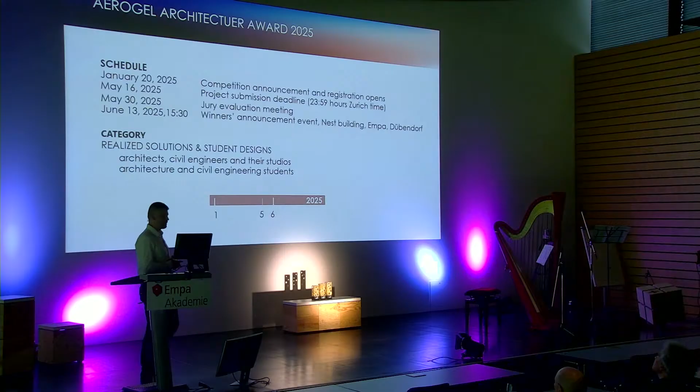In our laboratory, EMPA 312 Building Energy Materials and Components, we would like to develop new aerogel materials, also to develop new aerogel material applications for buildings. And...

That's why we established the Aerogel Architecture Award. And we are especially interested in the thermal insulating property, translucent property, and also acoustic properties, and their use in architecture. So building application of aerogels, that's why it was established.

And this year, in 2 categories which were open internationally, realized solutions and student designs, but they were joined into a common joint category for this year. Purpose of this award...

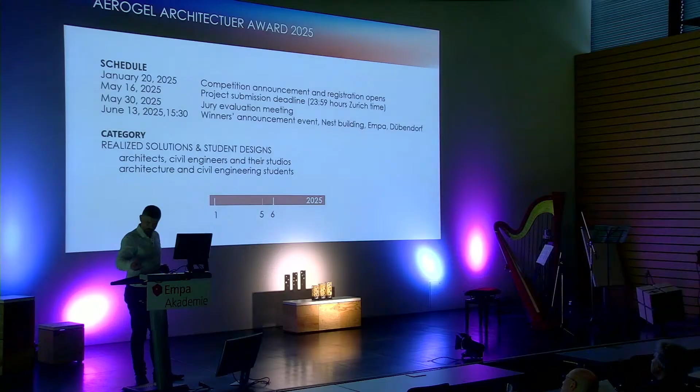is to highlight great examples of aerogel use in buildings and summarize experience on aerogel use in architecture and construction. And we believe that it can strengthen the knowledge and also the trust, which was mentioned already here, in use of aerogel materials. This was only possible due to our...

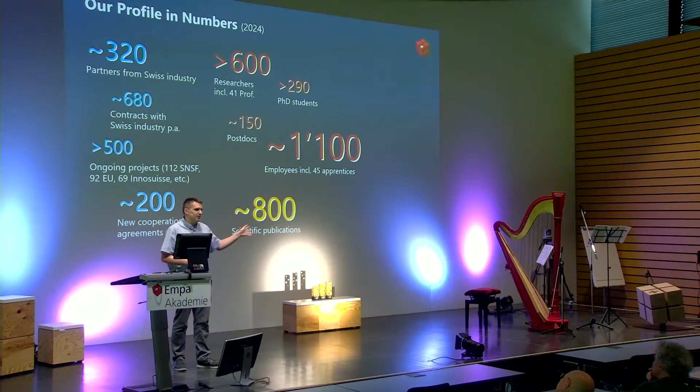As I said, we are about 1,100 employees. We publish scientific papers, but we also have a lot of research projects and contracts with Swiss industry partners, also some European and international industry partners. We have 37 spin-off companies, and we have a base funding from the Swiss federal government, which is augmented by third-party funding, project funding.

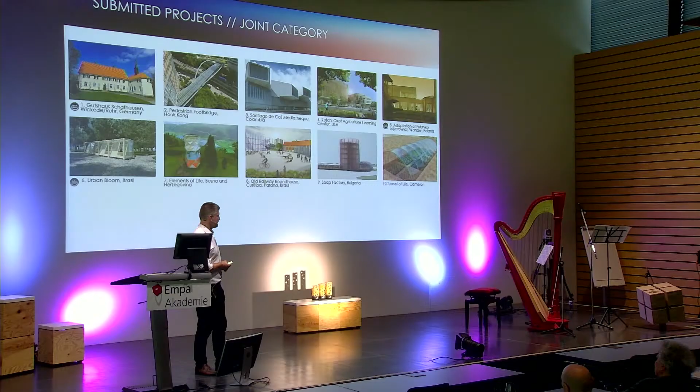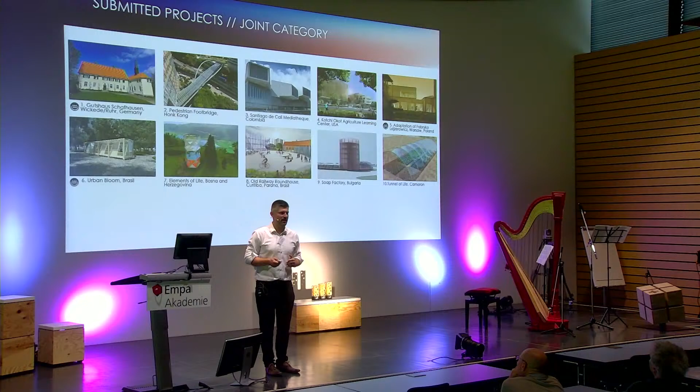Thanks to their experience, the selection and evaluation was in great hands. So we received in these two categories 10 projects. We know that aerogel in buildings is niche, but we didn't know that it's so niche. So the jury decided for this year to join the categories and evaluate all projects in the joint category and reward them with the same monetary prize.

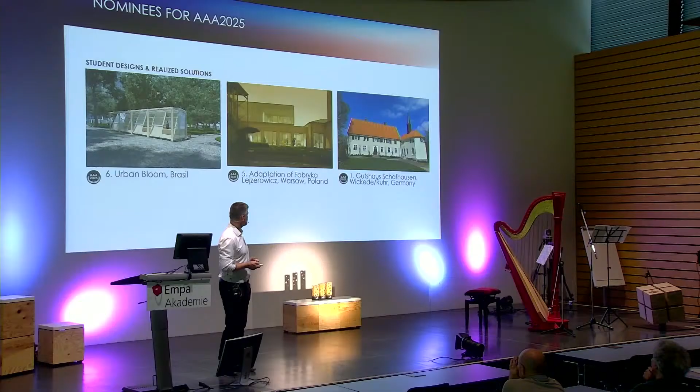Some selected projects: the first project is a proposal for a greenhouse called Urban Bloom from Brazil, by students from Brazil. The second project will be adaptation of a factory in Poland, Fabryka Lejzerowicz, located in Warsaw, Poland. And the third project, a realized project, is the renovation of manor estate house, Gutshaus Schafhausen, placed in Wickede, Ruhr, Germany.

So now I will ask our esteemed jury member, architect Manfred Wehdorn, to give some words on the award and selection of the jury. Okay. I can take it.

Okay. It's working? Maybe it's working. Should function. Yeah, perfect. Nice afternoon to all of you. I'm one of the members of the jury coming from Vienna, as you have heard. And may I make at first a general statement?

I would say talking about aerogel means talking about sustainability. To look back to the history, I'm not only an architect, I'm a historian too. You remember perhaps 57 years ago, the Club of Rome was founded. And in 1983, the United Nations founded the World Commission for Environment and Development, a long time ago. And it really took a long time until we all developed the importance of sustainability. Then the Common Future report was published by the Commission for Environment and Development.

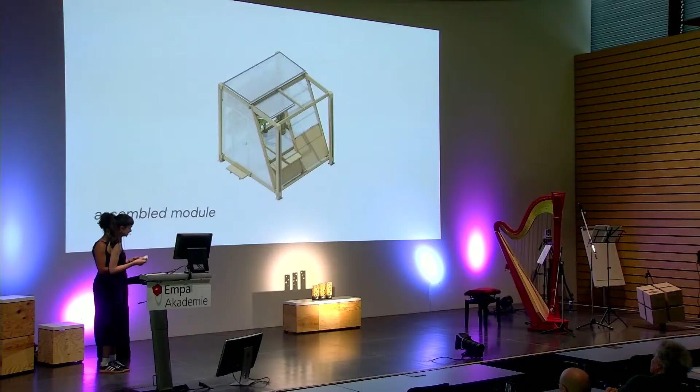Here is the assembled module. It consists of a glue-laminated timber structure sealed with translucent polycarbonate panels filled with aerogel.

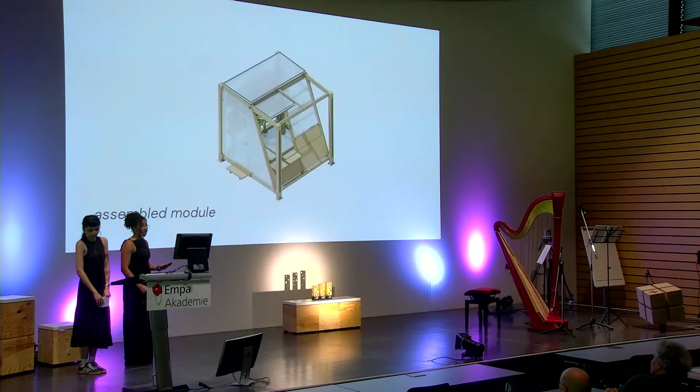The design emphasizes modularity, enabling this unit to connect and be assembled with others if needed to scale to a bigger project.

The module is compact, yet very functional because it has an inclined facade that can be changed and can create openings and display shelves, so it can function for selling as well as marketing. I would say it's a very functional, modular design.

As I said, you can scale according to local needs. So if you need a bigger assembly of modules, you can just unite them and make design choices according to the place it is in.

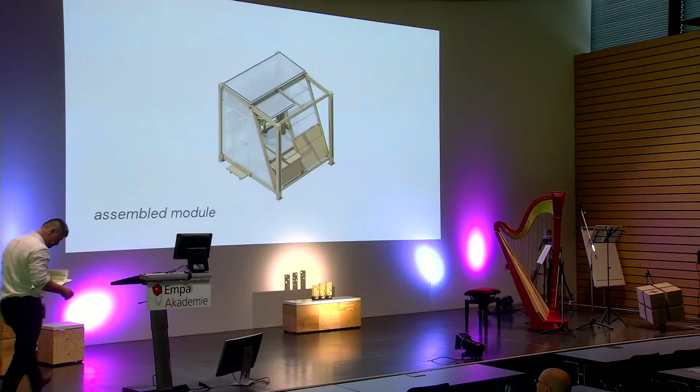The second presented project in this joint category will be the adaptation of Fabryka Lejzerowicz Lubelska Kamionek, located in Warsaw, Poland.

Design is made by students Jiří Petrželka and Kristýna Klusová from Czech Technical University, Department of Architecture, Prague. I can say that this duo also already won, two years ago, the Aerogel Architecture Award 2023, first prize in the student category, and it's a great success again that you were selected among the nominated projects.

Floor is yours, Jiří. Unfortunately, Kristýna could not come, but yeah.

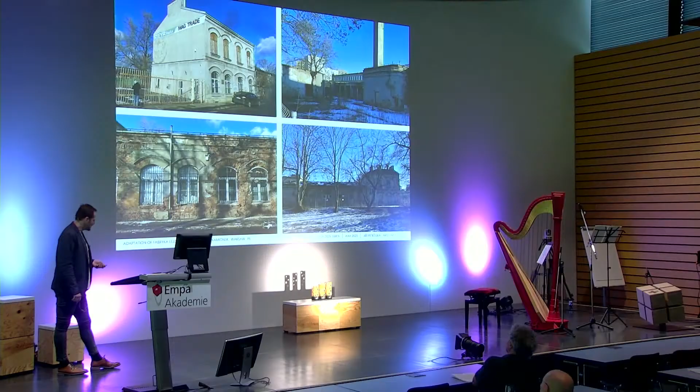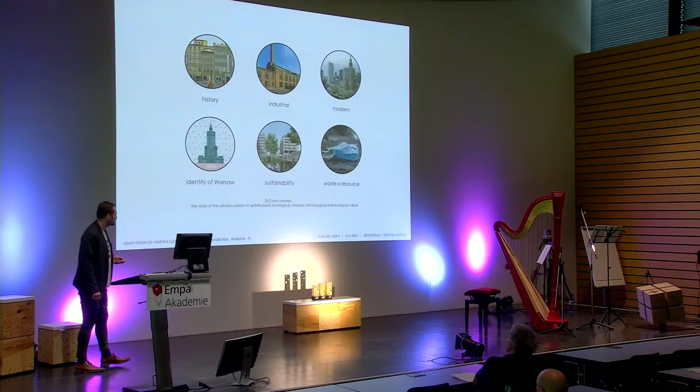Here you can see some photos from the area. As you can see, the building is in really bad condition for a lot of the properties or premises. The key for our design was how to connect history and the industrial history with modern sustainable architecture in Warsaw, which is key to the new identity of the city. The last point was how to work with reduction of the amount of waste and resources.

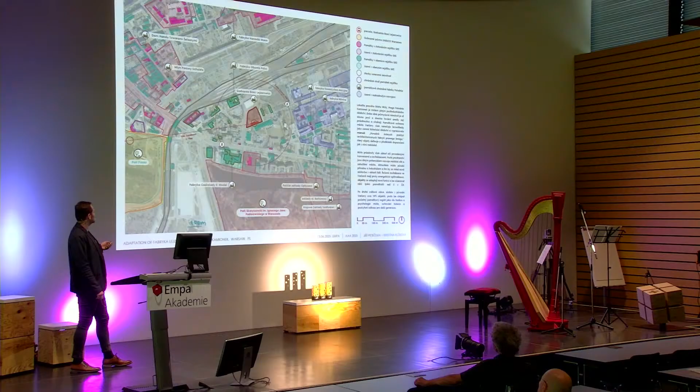In analysis, you can see that the site is near a train station and bus station with really frequent train and bus traffic. Here's an analysis of the site, where you can see that a lot of parts are the heritage protected building areas, and a lot of parts are in the new vision for the next transformation. The entire area is full of parking cars due to the frequent public transport.

The first question was how to transform the brownfield into a new architecture catalyst that changes this area in Warsaw. And here's the result. We found the best connection that we designed: from the old building, a new culture and public center, and the rest of the building is co-living, which is owned by the city.

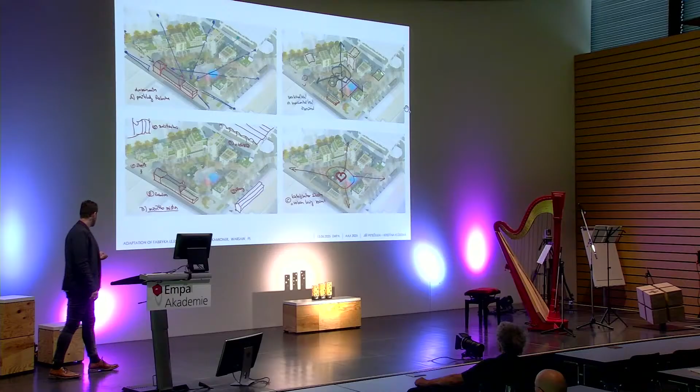Here are some urban concepts that we focus on: some views and connections, the division of spaces in height, that our courtyard is the heart of the entire project, and we work with human scale.

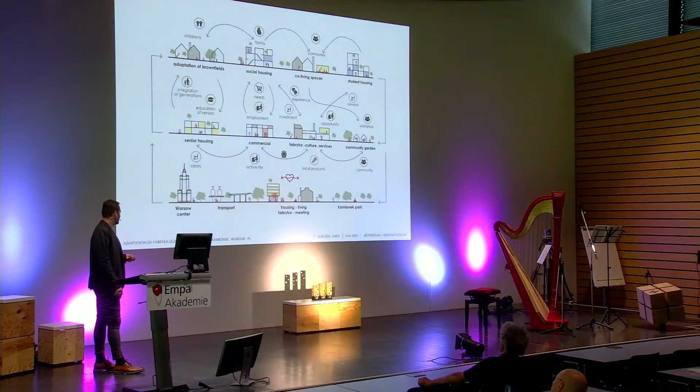Here's some of our social and urban concept, where we want to focus on connections and the flows between the people in the new area and the entire city. We want to make, from our side, the connection between the city center, the transport, and the surrounding area.

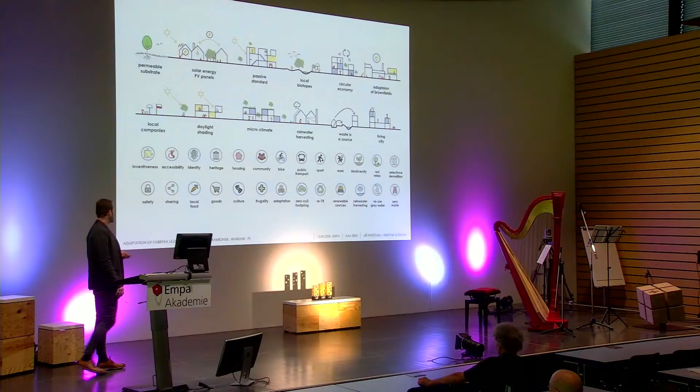Here are some points of our sustainable concept, which is the basis of our architecture design. Due to the complication of the entire site, here is the LCA timeline of the entire project.

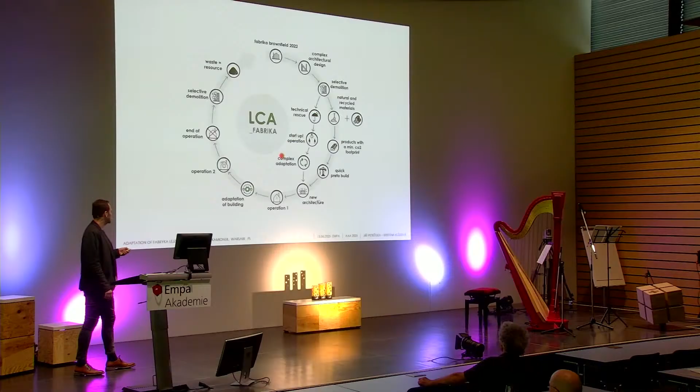We start with the design, selective demolition of the surrounding area, and two lines. The first one is a really quick prefabricated development, and the second is the technical rescue of the Fabryka, some meanwhile solution, and after that, complex adaptation, and the rest gets new life in our place.

Here's the visualization of the new co-living in Warsaw. The ground floor has at its heart a multifunctional yard with playgrounds, and the ground floor is full of common rooms and commercial premises. The typical floor is full of building units with some common rooms for the residents.

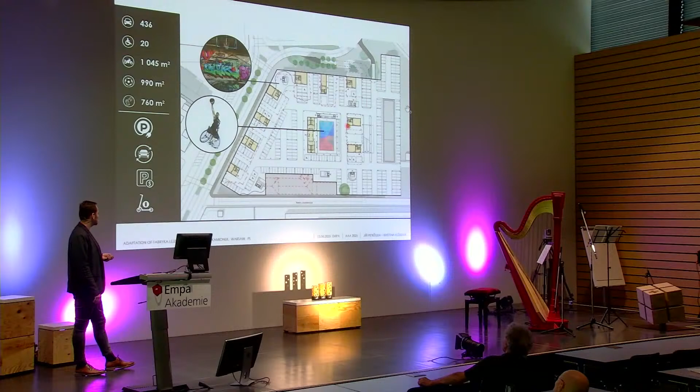Underground includes public and private parking with a multifunctional playground. The landscape, or rooftop landscape, in our view is a place which can give us more functions than only cover or protection before the rain.

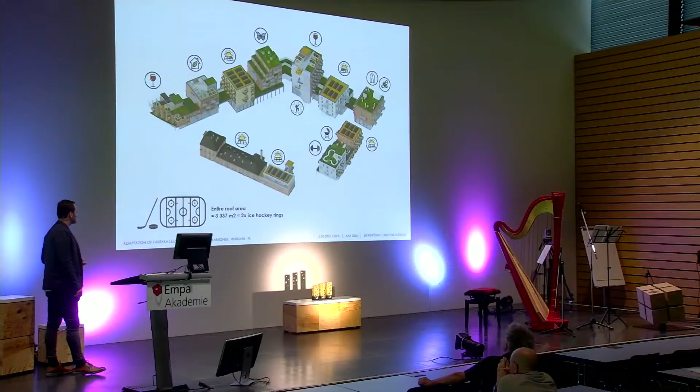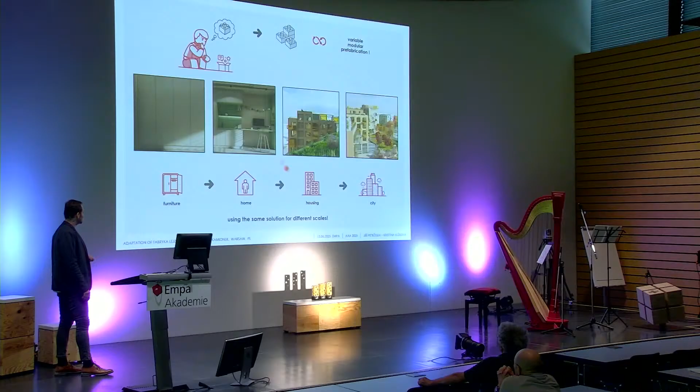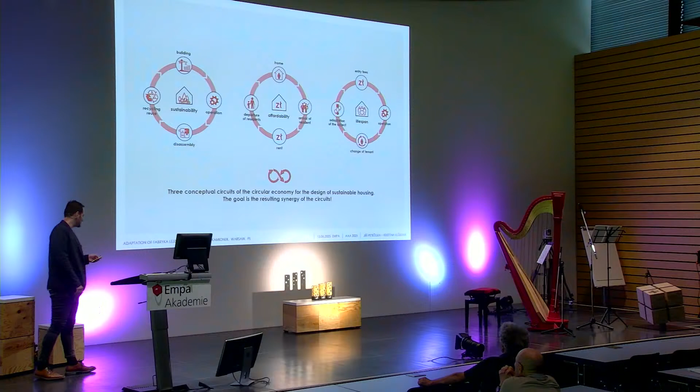This co-living is designed as prefabricated architecture, from the small scale of furniture and home housing to the entire city. We use the same system for everything, and everything works. Our entire project is designed as affordable community living, which is owned by the city, for everyone.

Here are some kinds of dispositions. It's something like prefabricated modules, with variable modular prefabricated boxes and an integrated internal sanitary box in the interior. In elevation, you can see that the first floor is made from thermally insulated concrete due to floods and high humidity, and the rest of the building is only from prefabricated blocks.

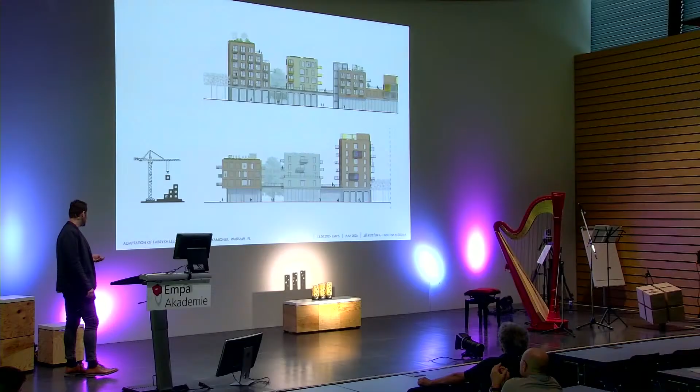Now, adaptation of the Fabryka. We start with collecting data about the building and communication with the heritage protection office in Warsaw, which provides guidance on good practices for architects.

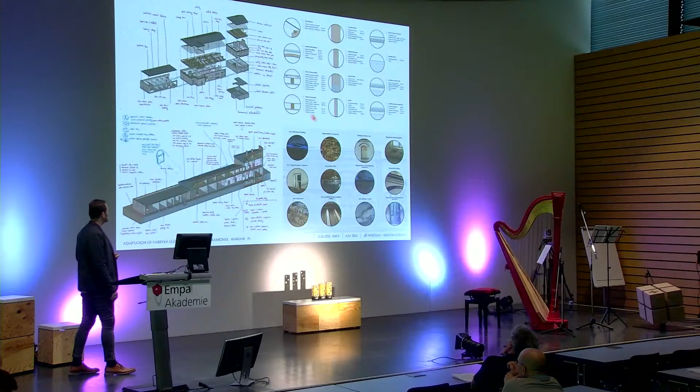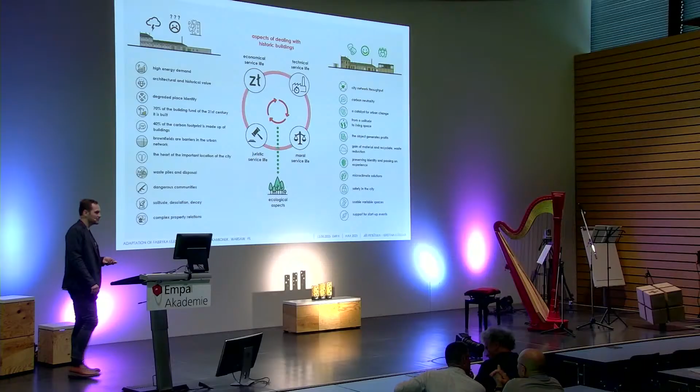We made a deep analysis where we found some details, problems, values, and other things. After that, we made a list of the reasons why it's good to adapt this kind of building.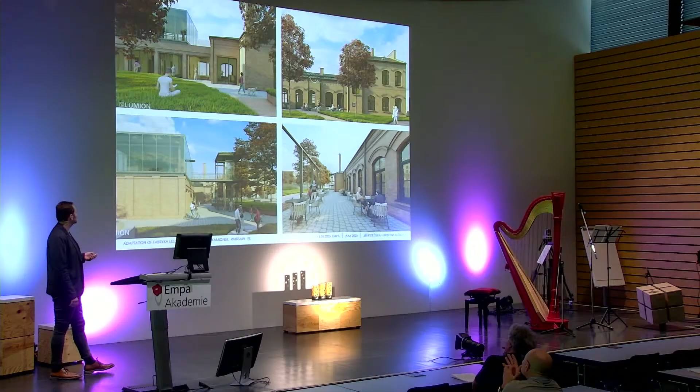Here's something like the street food, multi-purpose halls and offices and place for meetings. There's offices, and in this new part there's co-work space, and in the underground, a meeting point and parking.

Section of our solution and how we solve some problems with the reparation of the old building and the new underground parking. Here's some visualization.

For example, the entire furniture in the hall is collected by the new community. We use this kind of interior design as a way to connect the people.

The next part is the new co-work space above the old building. It's an open, flexible space for everything, with really good adaptation potential in the future.

Visualization of the interior. The construction is something like a glulam timber frame module with a curtain wall with glass. The glass facade uses electrochromic glass and transparent photovoltaic foil, which protect the interior from overheating.

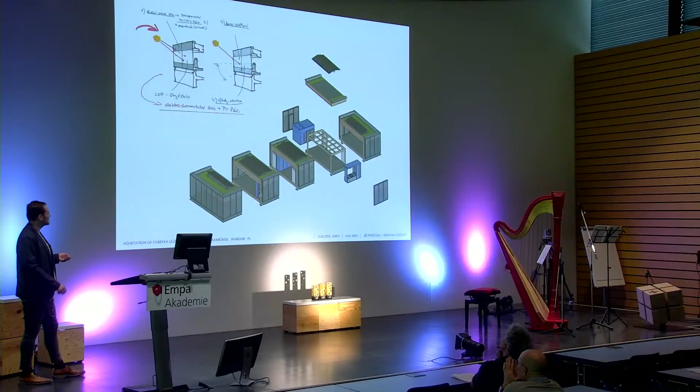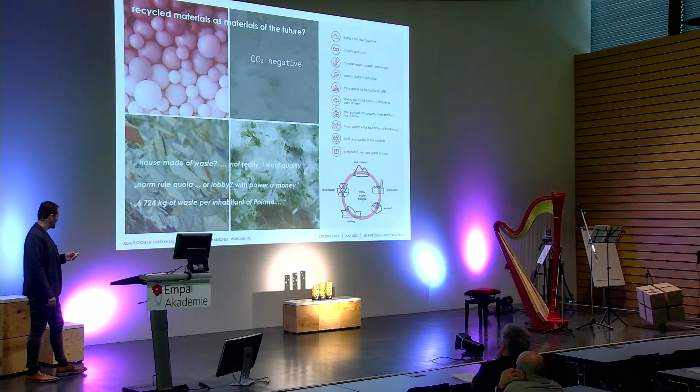Next topic: from our point of view, entire human production ends up like waste. In the future, we think recycled materials and materials from waste will be the materials of the future. Reusing and recycling is one way to find new sources.

The next way is working with selective demolition and urban mining. So we designed this library of known or atypical materials from waste, demolitions, etc.

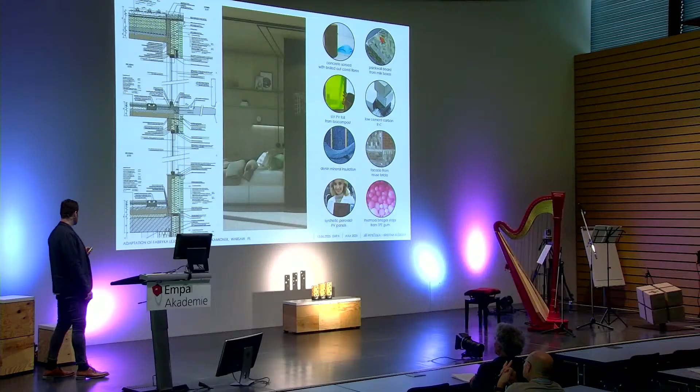For example, we have some materials made from COVID mask fibers. We use this kind of material on the same level as typical materials, and we use it on our co-living building for the adaptation of the historical building.

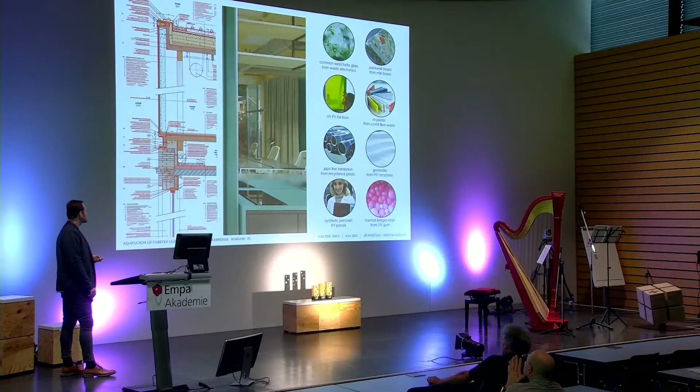And the last part, how we use our aerogel in our design. We use our aerogel as an internal insulation system in our old buildings for the facade, and for some typical or atypical details in the new part of the building.

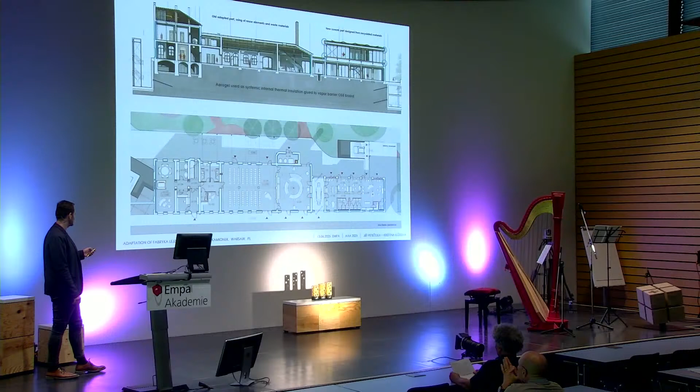We designed it as a combination of aerogel and OSB insulation boards. So we take the aerogel insulation with some thickness and typical aerogel adhesive and glue it to the OSB panel, which works as the vapor barrier and a supporting system for the aerogel.

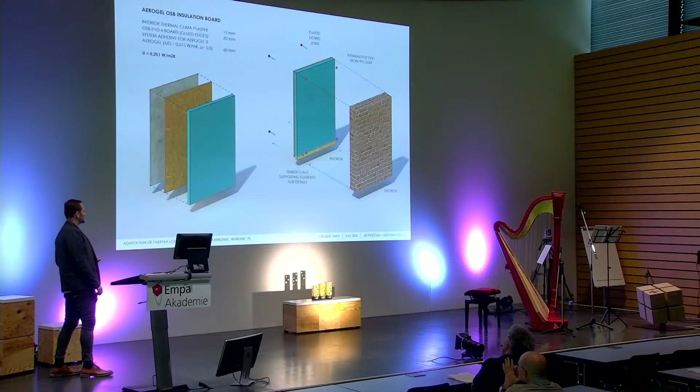One of the reasons is that due to the heritage values of the building, it was necessary to keep these bricks as the visual element of the facade. After that, we drew some details and the application for the building while respecting all the historical parts.

After optimization, the energy demand class of the building was improved from class G to class A.

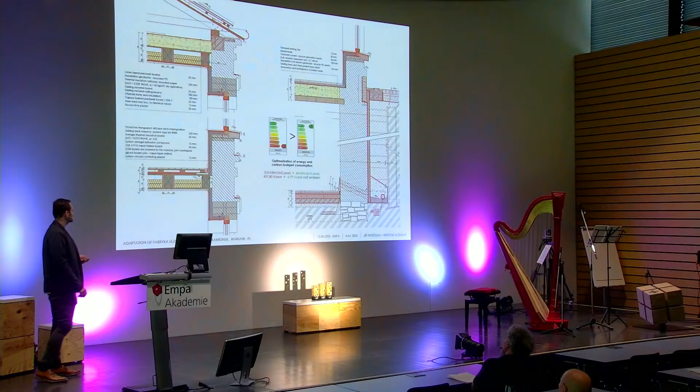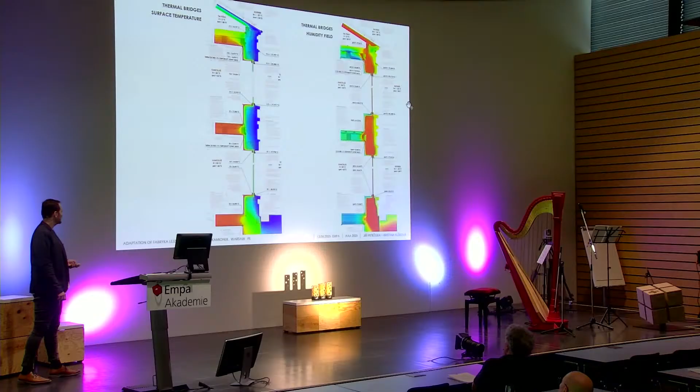Our solution, in our point of view, is a little bit atypical, so it was necessary to run thermal bridge simulations, where we checked problematic spaces with surface temperatures and humidity fields. After that, we confirmed we don't have a problem in the construction systems.

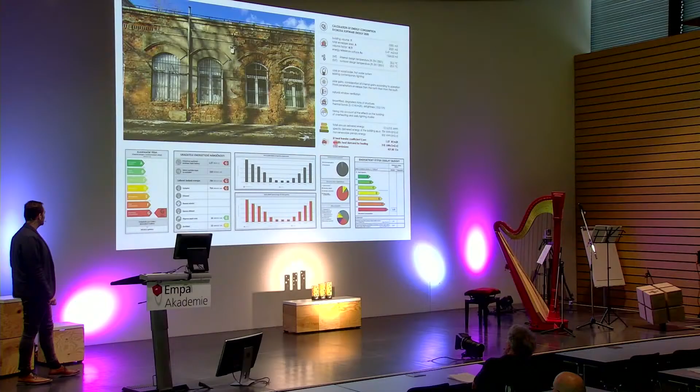Here you can see the status of the building during the adaptation. Everyone can see it was very bad, but the biggest problem was the catastrophic status of the building.

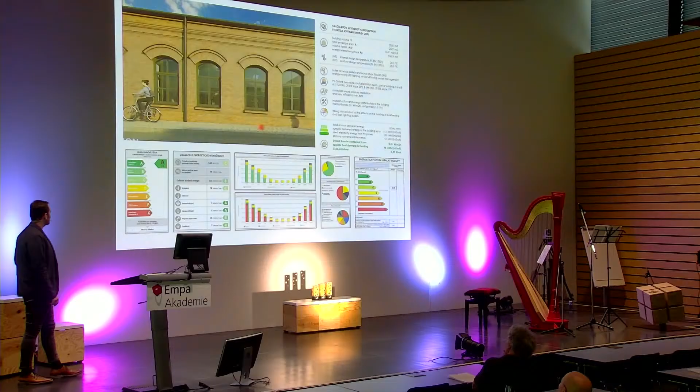After it, we have a new sustainable building with heat demand at the level of low energy buildings and class A, and the operational emissions of the building are below zero or near zero.

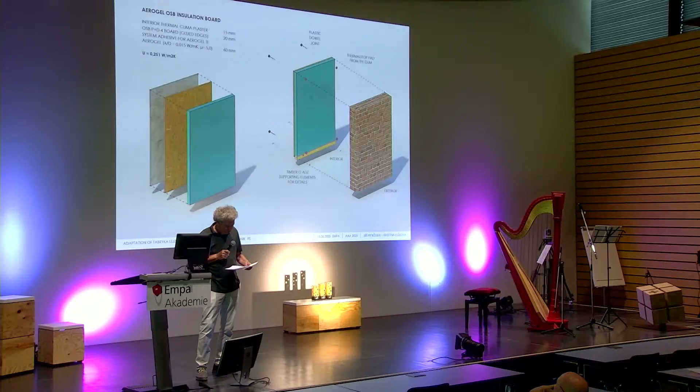To save the facade, they are insulated on the interior with 40 mm aerogel panels and a climate-regulating clay plaster. Integrated photovoltaic panels on the roof construction complete the energetic system.

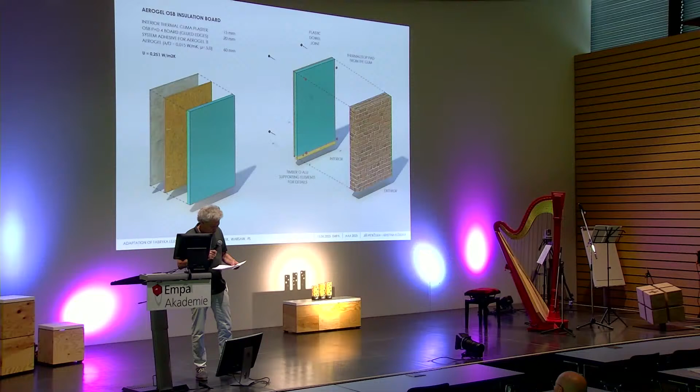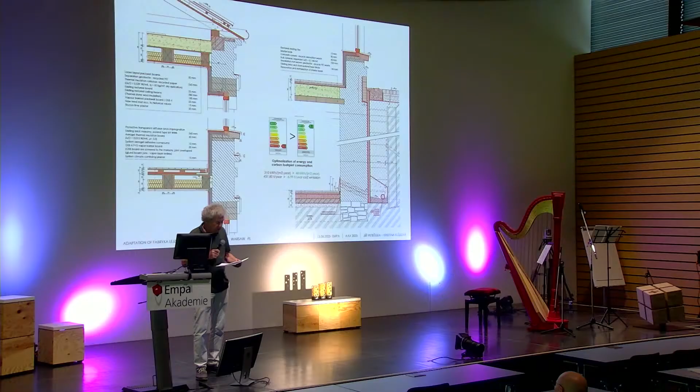Thermal simulations of the constructions prove the effectiveness of the chosen solution. The study is a showcase renovation project for different sustainable constructions, including the advantages of aerogel. Thank you.

The last selected project in this joint category of nominated projects is a realized renovation project, Manor Estate House Gutshaus Schafhausen, located in Wickede, Ruhr, Germany, from architect Friederike van der Loo, Schulze, Schwienhorst, Studio Wohnenplaner, located in Münster, Germany. Unfortunately, she could not join us today, and it will be presented via pre-recorded presentation.

But we would like to acknowledge also the contribution of engineer Ralph Kruger for site management and construction supervision, the Lower Monument Authority of City Wickede, and Upper Monument Authority of LWL Münster, as well as ESV Engineering Office from Arnsberg. So following will be a presentation via pre-recorded presentation.

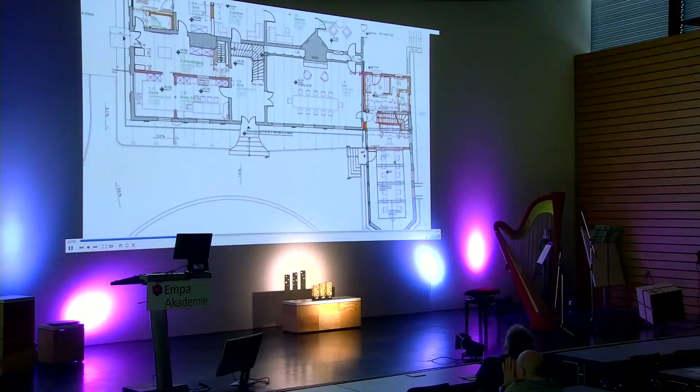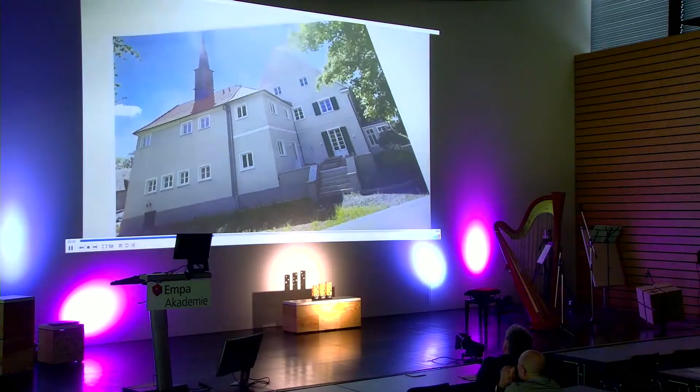When the current owners acquired the house and property in 2018, we did not yet know what lay ahead of us. The general planning was initially quickly done: the main house would remain a residence for a large family, and the chapel would be converted into a meeting and seminary room, relaxation room, and now also serves as a civil registry office for weddings for the community. An adjoining washhouse replaces the toilet tower.

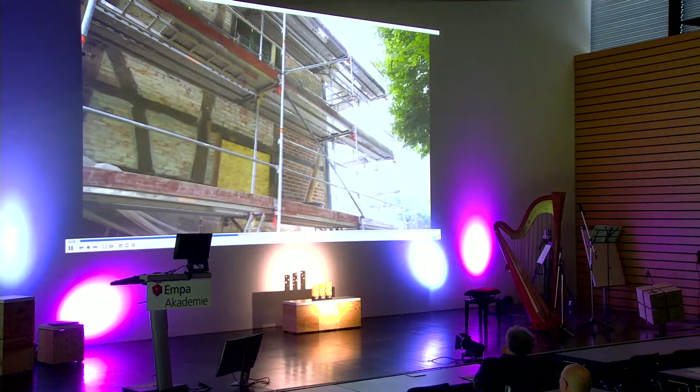Here you see a photo from the first day of inspection in 2018. Then we approached the property, and after the vegetation was removed, the first part of the problem became apparent. The entire base areas had often been plastered with cement finish, and when this plaster was also taken down, the house was revealed. Both internally and externally, the major issues in the restoration of the timber framework became evident.

At the same time, we considered how we could tackle the plastering issue, as there were already some considerations regarding the energy supply of the house. The goal was to heat with as low a temperature as possible, as ecologically as possible, and the objective was to use building materials that could all be separated from each other if one wanted to do it differently. The following decisions were then made.

At the southern edge of the property, there was a barn that had since been converted into a breeding stable. And in the basement of the stable, a heating house with a double wood chip heating system was built, which can now supply all buildings of the property in the form of a district heating network.

It was decided to excavate 50 centimeters of the non-solid part of the main house to bring in crushed glass as a base for the new floors. They are all equipped with underfloor heating. Additionally, wall heating has been integrated into the clay plaster in critical, thermally sensitive areas.

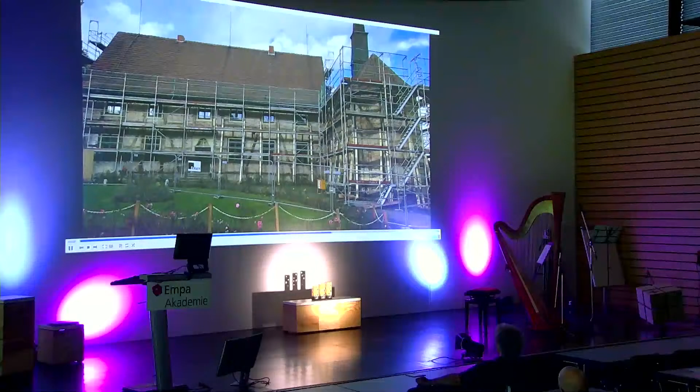And then it started, with a big number of different details. Unfortunately, after several weeks of work, we found out that the first company had not worked properly. This led to the necessity of completely tearing down the plaster and substructure in the area of the main house, and then having to find a new company. This one worked well on it, supported by experts from Fixit, so that in December 2023, finally, after 5 years, the house's scaffolding could finally be taken down. And for the first time, we had the new house completely in front of us.

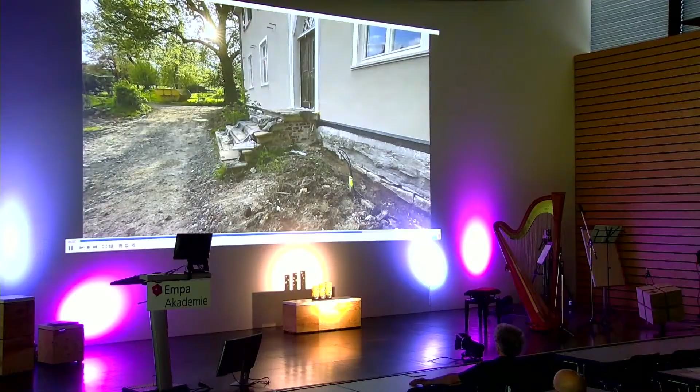In the following stages, the base coats were integrated. That could only happen after the completion of the terrace buildings, because this had to be done together. The wonderful aspect of this very thin insulation plaster with scratch plaster is that it was able to work with the very rough, crooked and curved surfaces of the timber frame. So we still have a very old building, but with new technology and new possibilities. In German, we call it steinfühlig.

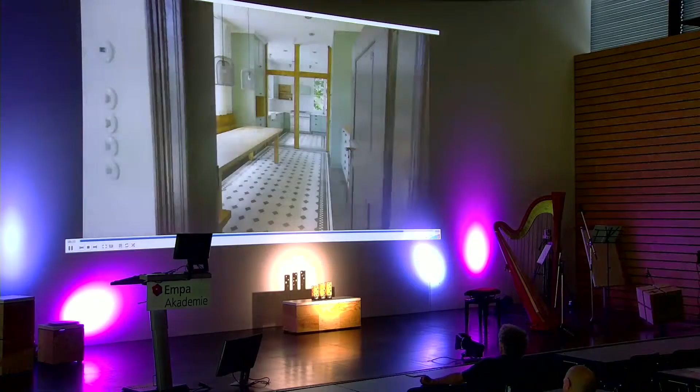We will save about 25 to 30 kilowatts of heating load, calculated. This also convinced the owner - admittedly, not in the question of when it pays off, but that he wants to take responsibility for consuming less energy. And quite obviously, in combination with the newly installed chimney and stoves, it works well in the house. The comfort in the house is very satisfactory. It is warm, cozy, and through the clay plaster construction, the indoor climate is exceptionally pleasant.

I will now show you just some photos from the inside as an example, so you have an idea. And here is a little tip: all the oak furniture elements you see in the photos were made from the old beams that were still worth preserving when the building was partially demolished. It seems modern, or? It was always done in the past - we just call it recycling or reusing now.